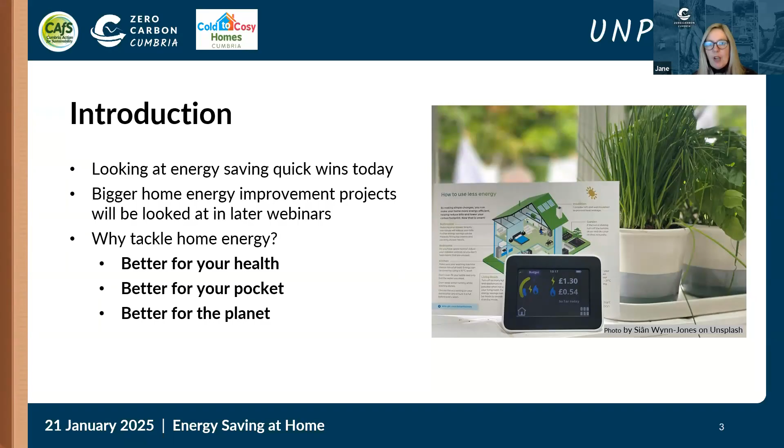Thank you very much. Good evening, everyone, and thank you for joining us. The first reason why we all want to save energy is that it's better for your health. Cold weather and cold homes can be very harmful, as the cold weakens the immune system, can increase blood pressure, thickens your blood, lowers body temperature, and can increase risk of high blood pressure, heart attacks, strokes, and can adversely affect long-term conditions.

During the colder months, people are tempted to crank up the heating when they first come in from work or get up in the morning. This can be counterproductive - it won't heat your home any quicker, and it will cost you more in the long run. It's better to set the timer on your room controls or boiler so your rooms are warm when you get up or arrive home. There are many gadgets you can buy to help with those heating controls.

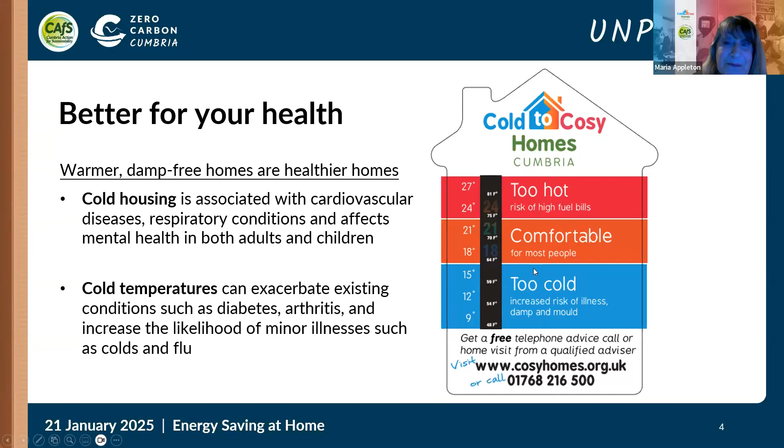The second reason for saving energy is that it's better for your pocket. Prices have risen exponentially over the last 3 years, and you will find that a bigger percentage of your salary may well be taken up with extra energy costs.

If you're familiar with the price cap, it changes every 3 months. It went up 1% in January, and it's likely to go up again in April. So now is a really good time to check your energy tariff - if you've not changed it for a while, it's a good time to look at switching to a fixed tariff, maybe for 12 or 18 months, somewhere in that region, to help you save money when the price cap goes up again.

At the moment, your electricity tariff should be just under 25 pence per kilowatt hour, and your gas tariff should be 6.5 pence per kilowatt hour. There obviously are standing charges you have to pay, and we can't do anything about that at the moment. But you can do something about the rate you're paying per kilowatt hour on your electricity and gas.

One thing that tends to confuse people: does the energy cap mean my energy costs are capped? The short answer is no. Energy capping only limits the price of the unit cost of energy - the more units you use, the more you'll pay.

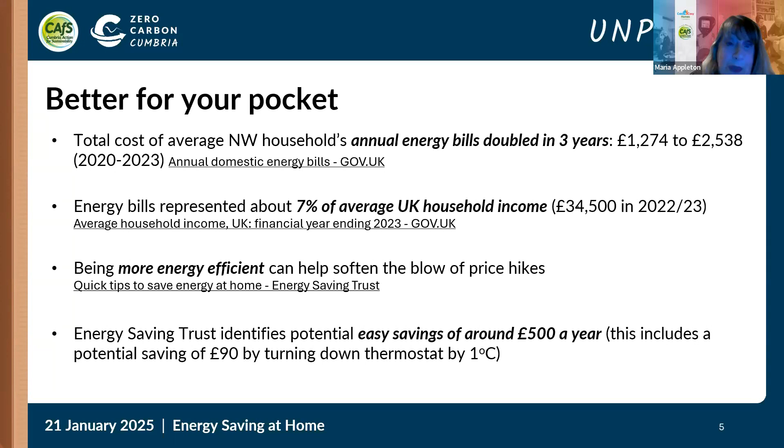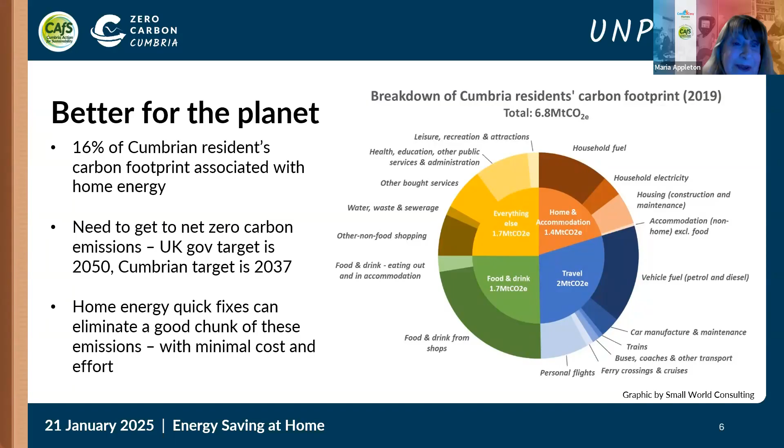So I can see quite a few people are putting roof and walls. Francis has said drafts. All good answers. Let's have a look at the next slide.

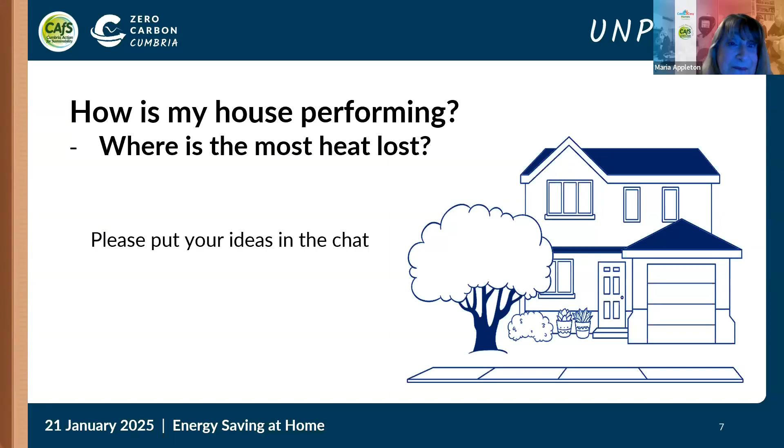So there's your answer. You lose 25% of your heat through the roof, 10% through the windows, 15% through the floor, and 35% goes out through your walls. That probably surprises most of you, but that's where you lose most of it. The 15% from drafts is what we've highlighted, because those are the quick, easy fixes we're going to talk about later today. Thank you everyone. Next slide please.

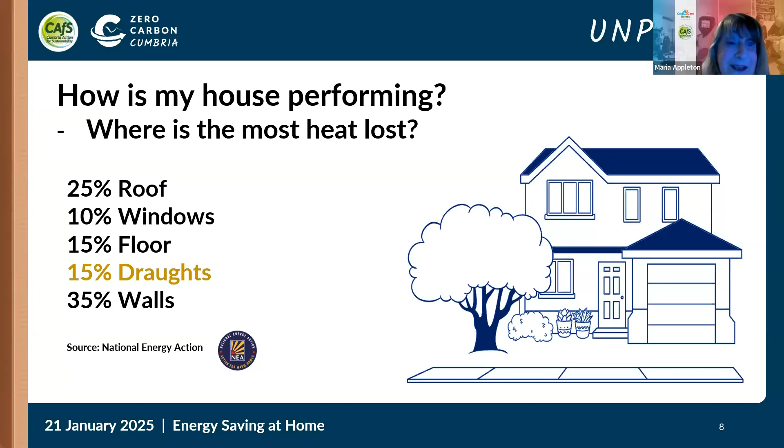I don't know, Dave, you can help me on this - it's about between 50 and 70 pounds for an EPC. Yeah, about 50 to 75 pounds, depending on where you are and who you get to do it. Okay, thank you, sorry, that's what I was going to say. So it costs money, but it's not that expensive.

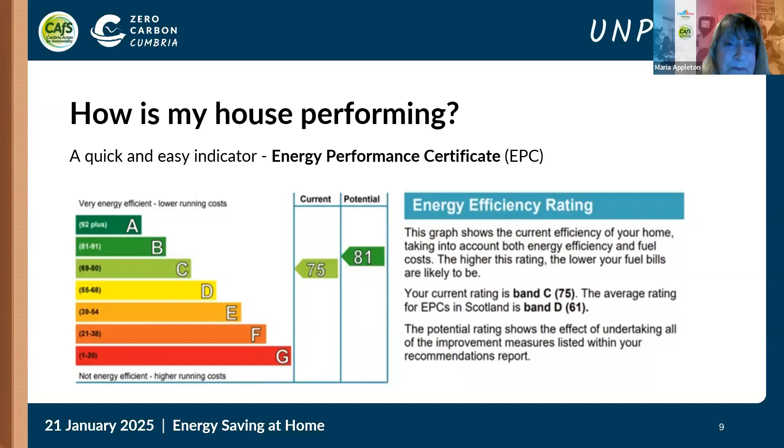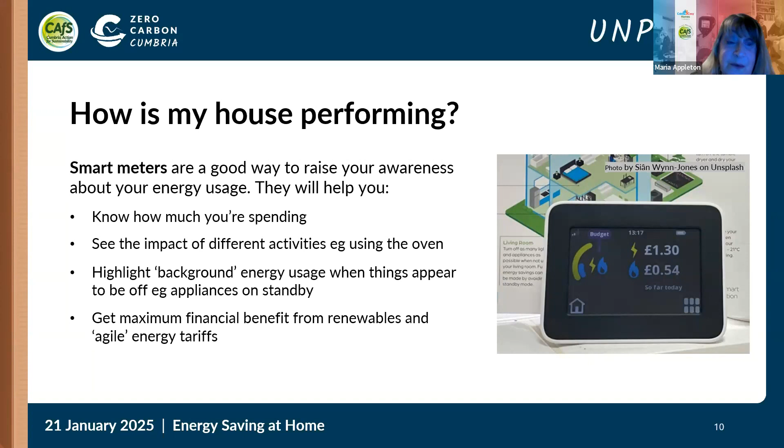Okay, next slide please. How is my house performing? One good way to check is to get a smart meter, which is a really useful piece of kit. It helps you keep a close eye on how much energy you're using and what it's costing, helps you work out how to save money, and gives you an energy bill based on what you've actually used rather than an estimate. There have been problems in Cumbria because of poor signal, but we're hoping over time the energy suppliers will sort out their infrastructure so we can all get a good signal and use a more efficient smart meter.

Next slide please. So we're going to look at some quick fixes - what can we do? We're going to look at three quick fixes: how we can fix some of these issues, being more frugal, and some smart technologies that will help us save money. Next slide please.

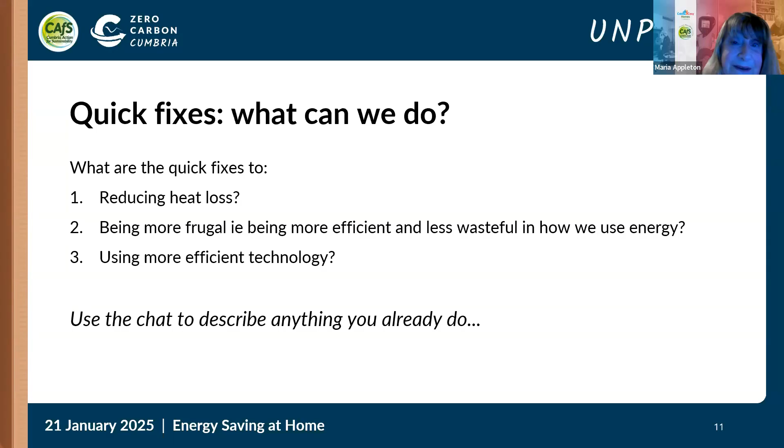The first thing I'd say is to check the whole house for drafts. Go right round and check every door, every window, even your loft hatch, to see where you're getting drafts. There are lots of quick fixes on the market - little draft excluders that go at the bottom of the door, or round the window. Even check your keyholes and letterboxes, because you can lose a significant amount of heat through those places, and there are easy quick fixes you can do yourself.

We also do a product called a chimney sheep, which can go up your chimney if you have an open fire - obviously not when you're using it - to stop drafts coming down the chimney. We also recommend using thermal-backed or thick curtains, keeping them drawn during the darker nights, but opening them and letting the sunlight in during the day.

I would also try and make it a family affair, playing energy saving games with the children and getting them to spot where energy is being wasted. It's actually Energy Saving Week this week, and there's a website called Energy Savings Week 2025 with event information on something called Twinkl, with lots of games you can play with your children to help look at energy saving.

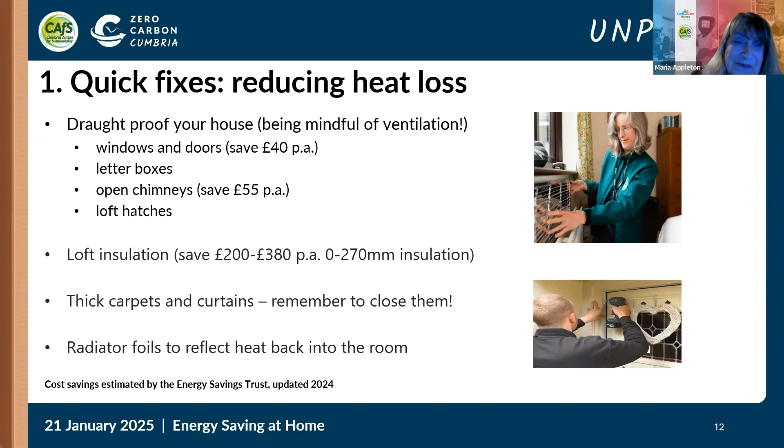Another quick fix is to look at keeping the person warm rather than the room. There are lots of ways of doing that, including layering up, but also thinking about things like a heated throw. If you're sitting watching television, or if you're less mobile, a heated throw is really good. It wraps right around you and costs pence per hour to run, so it's cheaper than having the heating on full blast.

Also think about where you've placed your furniture in the room. If you've got a sofa up against the radiator, you're not helping that radiator work efficiently. You need probably about a 12-inch gap between any furniture and the radiator to make sure it's working as efficiently as it could do. So always think about where you can be more frugal.

Hot water - we also spend quite a lot of money heating our water. So think about things like not running the tap when you're washing dishes, changing from baths to showers. And if you are having a shower, keep it down to about 4 minutes. That will save you an awful lot of money over the course of the year.

Lighting is another one. Try and use LED light bulbs wherever possible. If you've got LED bulbs right through the house, you'll save probably about £12 a year. Doesn't sound a lot, but all these little things add up over time. Get into the habit of switching lights off when you leave the room. I know children leave lights on all the time, so you have to drill it into the kids to turn the lights off when they leave the room.

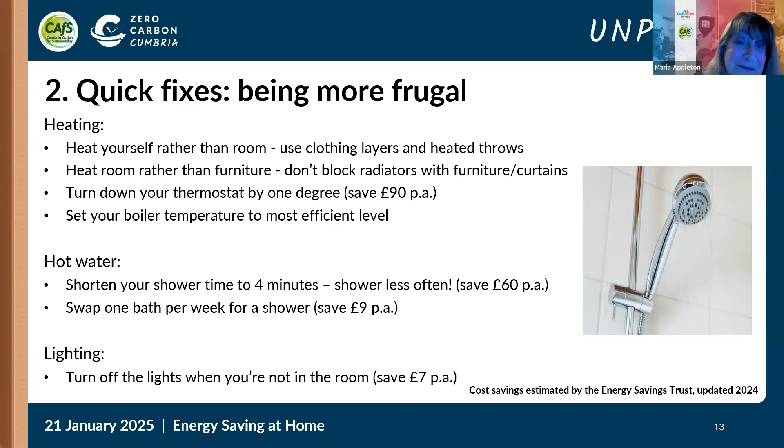Thank you. Next slide, please. More quick fixes.

One thing I would stress to everybody is to look at your appliances and turn them off, especially smart TVs, games consoles, even your phone chargers. They're what we call energy vampires - they suck in energy even during the night. Smart TVs are constantly downloading information, so make sure when you go to bed at night that you switch everything off and ideally unplug them.

Think about when you're doing your laundry - try and do your washing at a little lower temperature. Try to avoid using a tumble dryer if you possibly can. We like to recommend dehumidifiers because they not only take the condensation and moisture out of the air, they also help dry your clothes more quickly. As well as that, you can now get heated airers that don't cost all that much, only about 7p an hour to run, and they're a lot more energy efficient than running a tumble dryer.

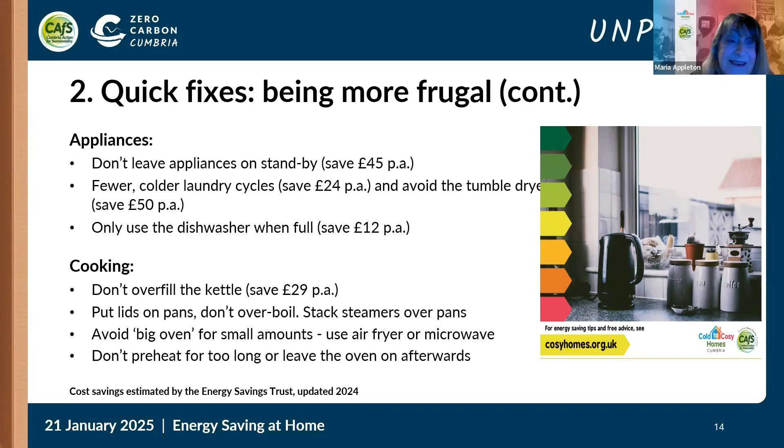Using smart technology can also help you save quite a lot of money. I've mentioned already smart meters - they come with a small in-home display which tells you how much energy you're using, and that can help you decide when to turn the heating up or off, or turn the TV off, and help you keep a closer eye on what energy you're using.

But I'm sure Dave will back me up on this - understanding your heating controls can help you use your system more efficiently and help save some of that energy. If you have electric storage heaters, there is an Economy 7 fact sheet available, and we'll put a link in the chat to that one as well.

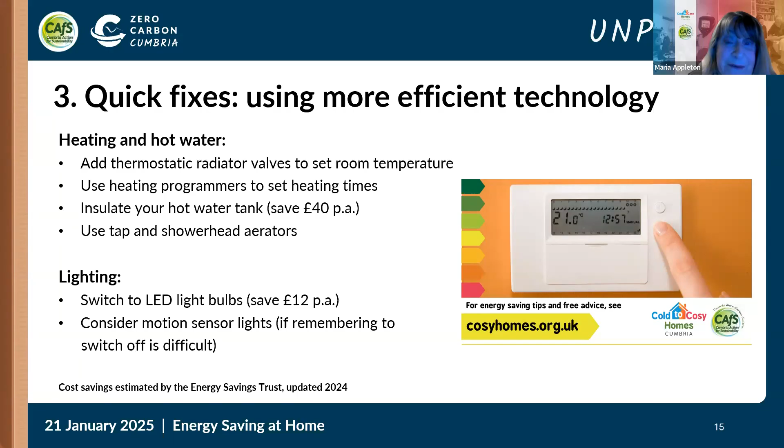Which magazine has just recently produced a list of running costs of home appliances, and you'll be really surprised by some of the findings - we'll put that link in the chat showing how much your appliances cost to run. Even something as simple as a fridge freezer, because it's on all the time, does tend to use a fair bit of electricity, so it's worth having a look at all your appliances.

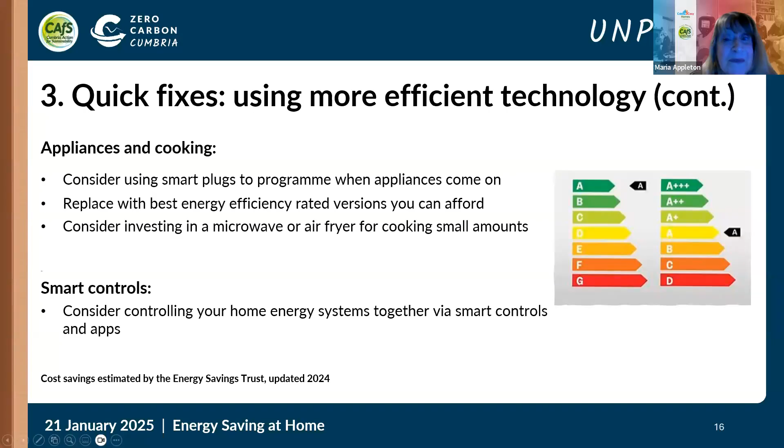Next slide, please. Any questions?

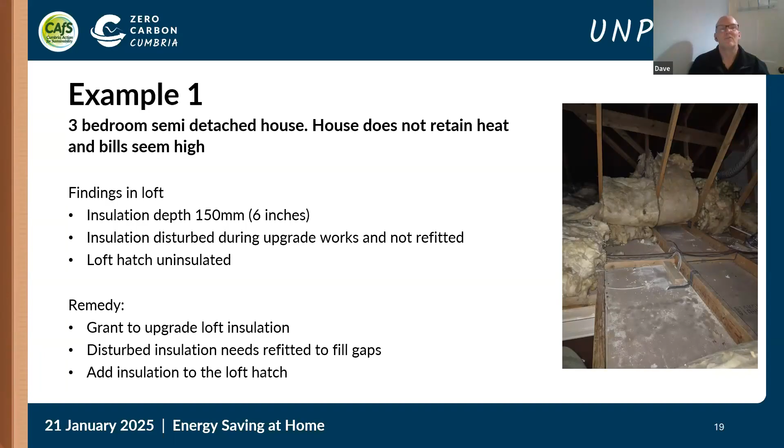So I would only use them in times of need, or it's what you can afford. No one's saying don't use your gas fire if you can afford to use one and you like it, but just bear in mind the costs associated with them.

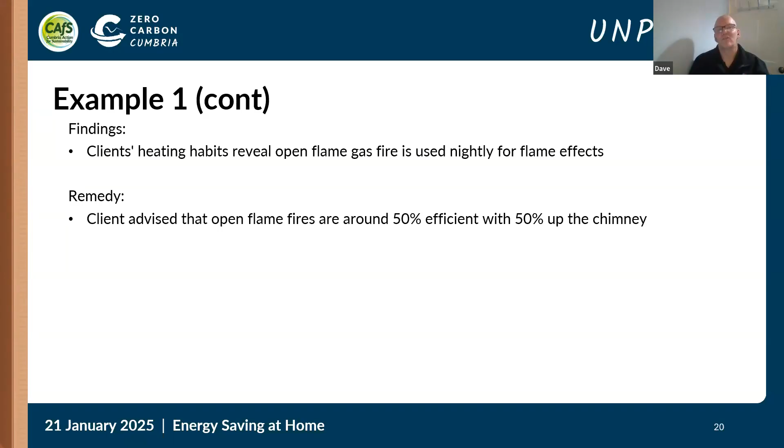Can we have the next slide, please?

Hey, sorry to interrupt before you move on to example 2. I wondered, well, to Dave and Maria really, and we've got plenty of time at the moment, so I thought I'd do it now if that's all right. We've got a question in the chat, I think it's Jane, is it? No, Julian, sorry, has said our loft has been converted into a home office. Is there anything they can do to improve the insulation around that office? Now, clearly we didn't want to get into retrofit or buildings examples in this webinar, but is there anything quick and easy that Julian might be able to do?

If you've changed your loft into an office, it's more to do with retrofit really, because a lot of things need to be done before you start. You need to make sure you've got the correct loft insulation in the roof before you start the walls and board it up. And you've got to be mindful that in the floor you don't squash the loft insulation you've already got, because that needs to trap the air to insulate properly. You don't want to squash that down, because it reduces the effects of the insulation. It depends if they've got drafts up there.

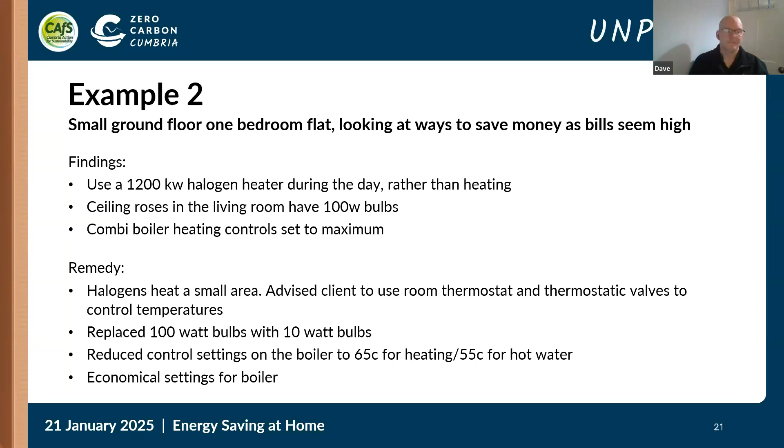So Dave, can I just clarify on that - did you encourage him to use his heating and turn off the halogen heater? His central heating? I did a little bit, and that was going off.

So I explained the costs, like on the slide now. A 1.2 kilowatt heater at 25p a kilowatt is 30p an hour, and he had that on for roughly 5 hours a day. That was like £1.50 a day, times the week was about £10.50. So over a month he was paying £45 just for the halogen heater, where that £45 could have been better spent on heat from the radiator, which would heat the room so he'd feel more comfortable with his heating on rather than just a halogen heater.

They're good for short-term use, but for long-term use you're better off with your heating. Again, like the 2 times 100-watt bulbs - if you had them on for 5 hours, that's 25p, which worked out at about £7.50 per month. Whereas the 2 10-watt bulbs worked out at something like 70 pence for the month for the same period of time. So there was a good £6 saving just on replacing the bulbs, full stop.

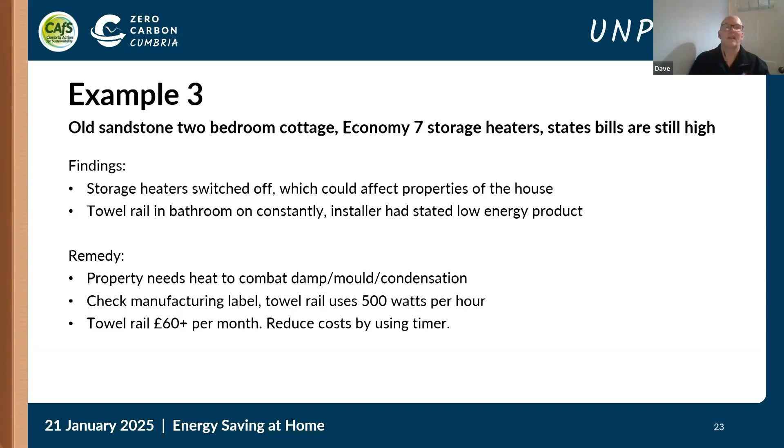It's easier to explain on the next slide. Because he's on economy 7, his economy 7 runs from 12:30 at night to 7:30 in the morning, and that would cost him 15p. But by having it on during the day, he was paying nearly 30p an hour. So looking at the examples there, for 7 hours it was costing him 52 pence at night, but during the day it was costing him £2.55.

Now, it was thermostatically controlled so it would kick in and out. But it just goes to show that over a period of time, it was costing him a good £50 to £60 a month just by having the heater on in his bathroom, and he wondered where it was costing him money.

He was saying, 'Oh, I've only got my television, my kettle and my air fryer, that's the only 3 things I use.' And it was only when I went into the bathroom and was knocked back by the amount of heat coming out that we realised it was the towel rail which was costing him money. So there's 3 simple examples which, for most people, just make you think that your appliances, anything that produces heat or needs heating up, are the things that cost you money, and so they're the things to be wary about.

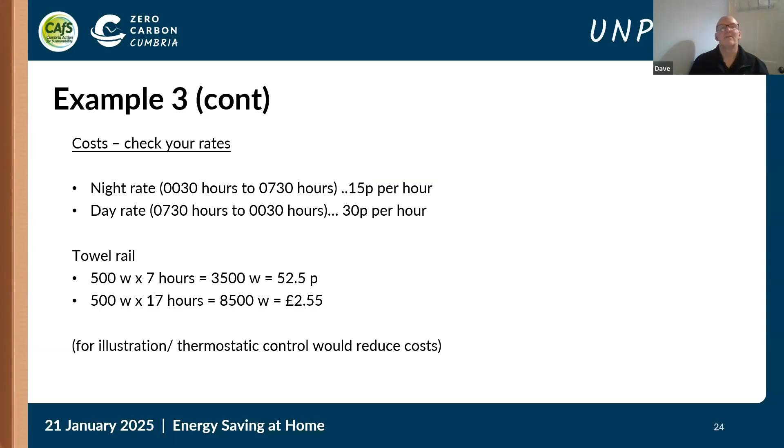And that's it, I think. Is there another one? Nope. So that's my 3 examples. If anyone has any questions, thank you very much, Dave.

So yeah, if you want to pop questions in, I know that we've had a question about back to the attic roofs actually. Are double glazed Velux skylights in attic roofs efficient insulation?

Yeah, they're designed for attics, so they are good if they are installed properly. I've been to some that weren't installed properly, and they caused more hassle than what they were worth. And I've seen someone saying about putting a thermal blind on them as well, which will also help retain the heat into the loft space.

Okay, great, thank you. So any questions, please just pop them in if you've anything. So we've got here one from Bex. Sorry I missed this, but how does using an electric shower compare to a shower that runs from the hot water tank?